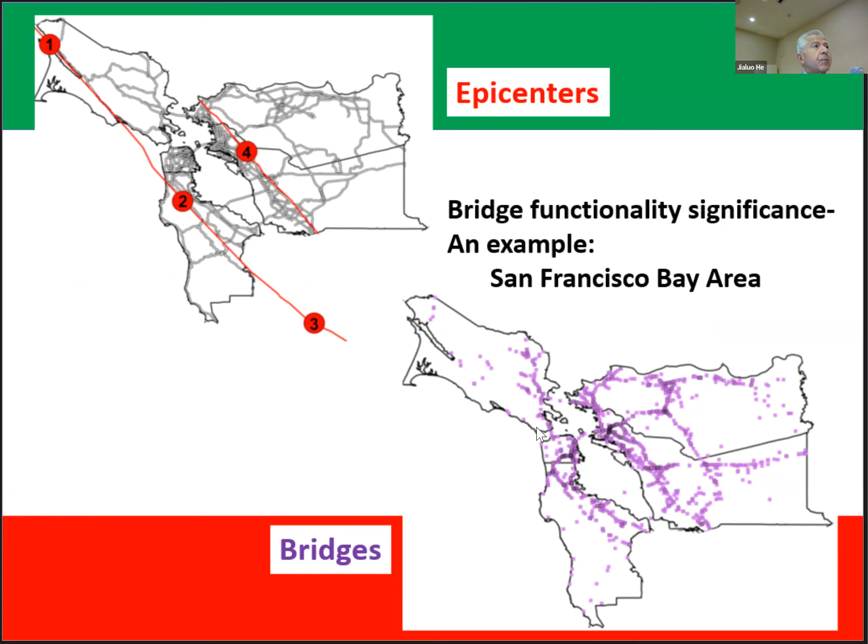So it is something very important - the fact that we are accepting substantial damage and the fact that bridges will not be replaceable. So our definition - we are all engineers or material scientists, right? Our definition of failure and success, according to our seismic design codes, are this.

If you look at the bottom figure on the left, that's a bridge that was subjected to the '94 earthquake. It did not collapse, so it met the design objective, right? But this is how the bridge looks like. You definitely have to shut it down to traffic, and it's not usable anymore.

Now, failure is the one on the right side. This is the one where we have a bridge column - believe it or not, it has completely failed, and this is the superstructure that has fallen. So this is a design failure, but this is considered a design success.

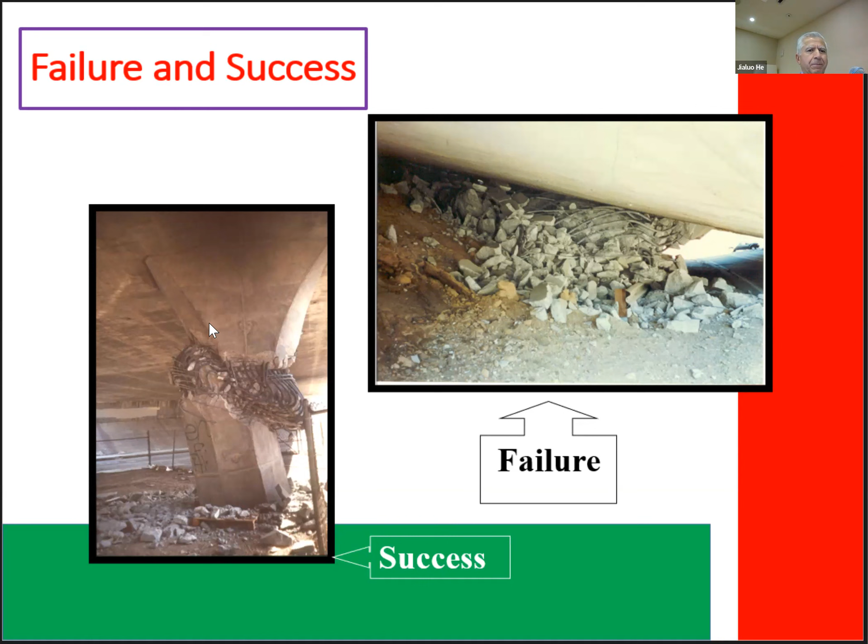And that's something that obviously the public will have a hard time understanding and accepting - that yeah, this is not successful, this is bad engineering. This is what they're going to tell us.

So what if we go back and rethink our basic design philosophy that we have in our codes? Maybe no collapse is not enough, is only partial success. So we should also look at serviceability after earthquakes. What are the issues? What are the seismic damages that you get? What are the things that we have to deal with?

Well, there are two things that happen during a strong earthquake. One is permanent drift that makes a bridge unusable. The other one is damage to plastic hinges, to critical parts of the columns, etc. So how do we address that? How do we try to address these two issues?

Well, there are a number of ways we can work with that. One is performance-based design, and we do use that in signature bridges - again, by far the minority of bridges. We might try to use base isolation to keep the bridges functional, or we may go to advanced materials of different types and different styles and different detail, trying to address this serviceability after the earthquake.

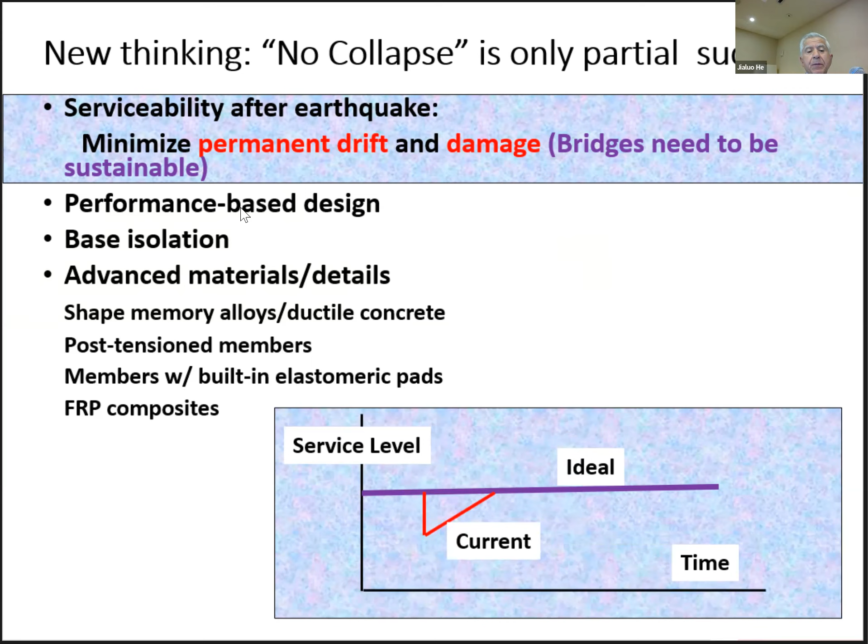So if you look at the resiliency curve that you have seen many times, that red zone is what we're trying to avoid. The red zone is what we're trying to either minimize or avoid so that we can, again, keep the network functional.

Now, let's talk about earthquake damage. And I say new bridges because I just want to make sure we are not covering substandard bridges that need to be retrofitted and all of that. No, I'm talking about the bridges that we design now and build now.

So these are the bridges from the past 20 years. We're pretty much meeting all the code objectives. So we have plastic hinge damage and permanent drift - these are the two main issues that make bridges unusable.

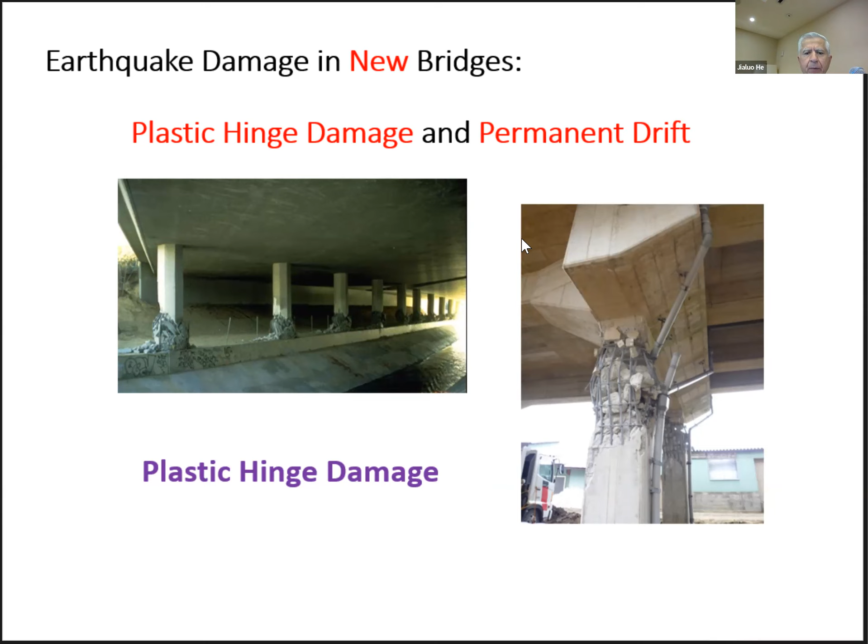So this is how plastic hinge damage looks like. Usually at the ends of the columns, that's where the maximum moment is, and we have the cyclic effect of the earthquake.

So going back and forth, and the other one is the permanent drift. After the Kobe earthquake, a lot of bridges, about 100 bridges, were torn down because of the permanent drift. If you looked at the damage in the columns, they were not that severe, but they were tilted. And because of that, people didn't feel safe to use these bridges, so they shut them down.

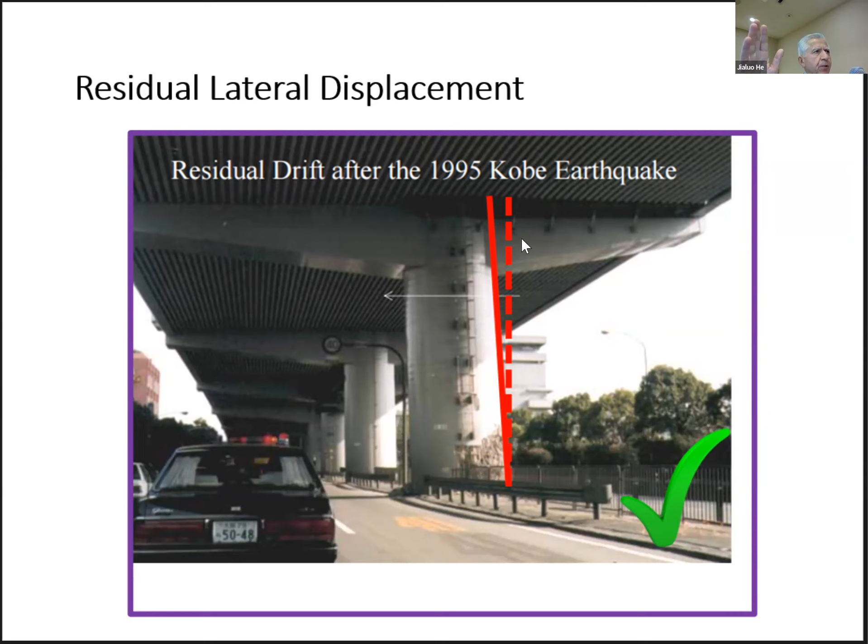So in order to keep bridges serviceable, there are two things we have to address: the plastic hinge damage, control that, and the permanent drift, try to avoid that. Now let's talk about the plastic hinge damage. What's causing plastic hinge damage in conventional reinforced concrete bridge columns? Well, concrete by itself is a brittle material, unless you help it with confinement and all of that.

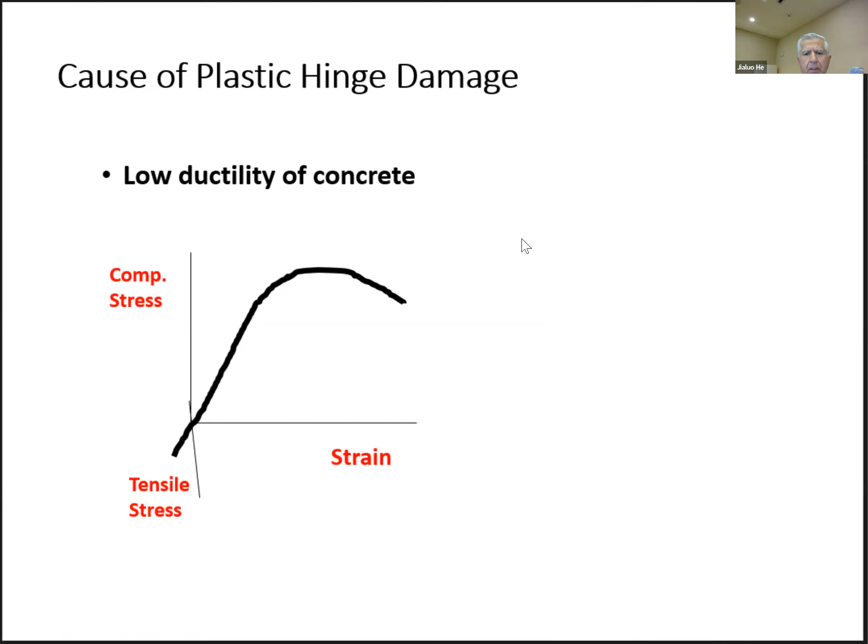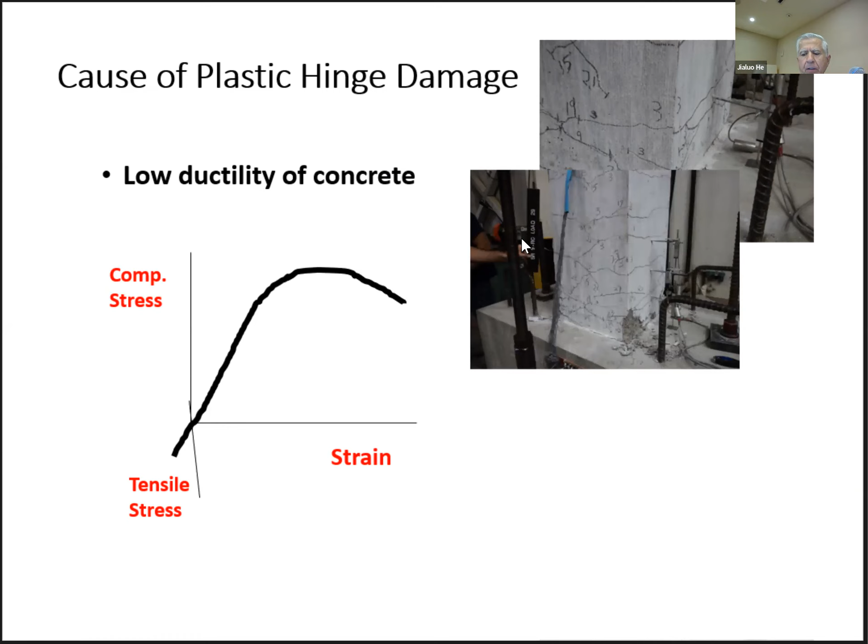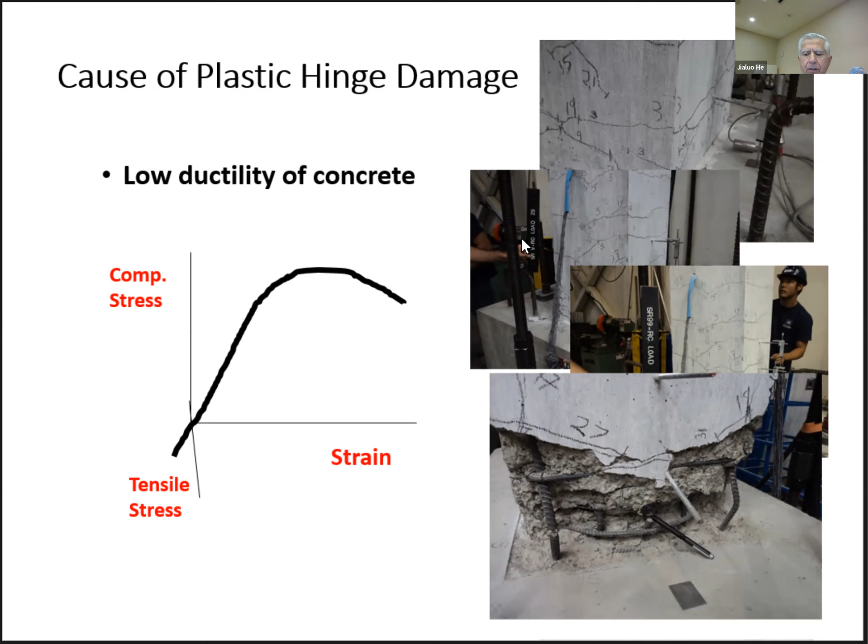So what happens is, let's say if you take a bridge column and begin to cycle the load to simulate the earthquake, in the beginning you have some cracks in the plastic hinge area. As we increase the amplitude, there is more cracking and spalling of concrete. This continues, and at some point you begin to have exposed reinforcement, and eventually fracture of the bars. So that's how we end up with plastic hinge damage. It's a low ductility of concrete, and especially the surface concrete, but even the confined concrete at some point, where the steel ruptures, the concrete itself will fail as well. So that's the cause of plastic hinge damage.

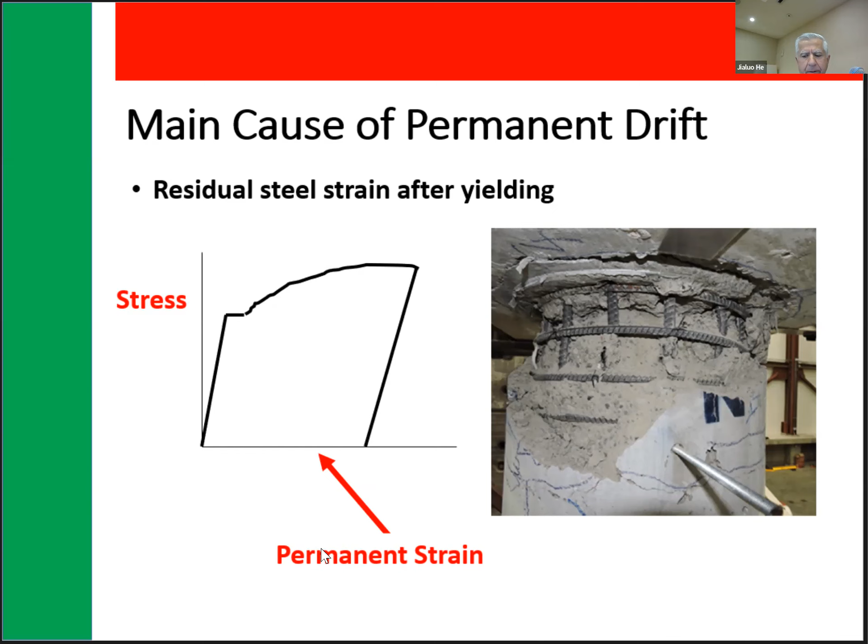How about the main cause of permanent drift? How do we get that? Well, for conventional construction of steel and concrete, the problem is with the steel. Steel is a ductile material, so if you look at the stress-strain diagram for steel, under strong earthquakes we are going to have substantial yielding. However, when the earthquake stops, we end up with this permanent strain, and that permanent strain translates into a permanent drift. That's when the bridge is tilted towards one direction, then it's not usable. It doesn't feel safe, even for ambulances and a variety of emergency response vehicles.

So how do we deal with plastic hinge damage? How can we reduce it? There are different ways to deal with this. The use of what is called ECC, which is basically a grout that has fibers—fancy name, engineered cementitious composite. It's a mouthful, but that's what it is. Or UHPC, ultra high performance concrete, where you have steel fibers. It's also possible to use elastomeric rubber material in the plastic hinge area—that idea came from Professor Kawashima in Japan some time ago. Fiber reinforced polymers are also a material that can be used to help.

So with ECC, this has a nickname of bendable concrete. This is a sample where there is no steel, just the fibers—polyvinyl fibers—and the grout. This is the rubber I was talking about. The UHPC gets very high compression strength, but it's able to maintain some level of compressive capacity under large strains, and also has high tensile strength. Composites also can help minimize plastic hinge damage. So a couple of samples of these you can see here.

So this is where we have a UHPC plastic hinge of a column, and we subjected that to shake table testing. This particular run was twice the design level, and you notice there isn't much damage within the plastic hinge. During this run we fractured it—we keep testing until there's failure. But at the design level, there was no issue at all. Even at about 175% of design level, there was no issue.

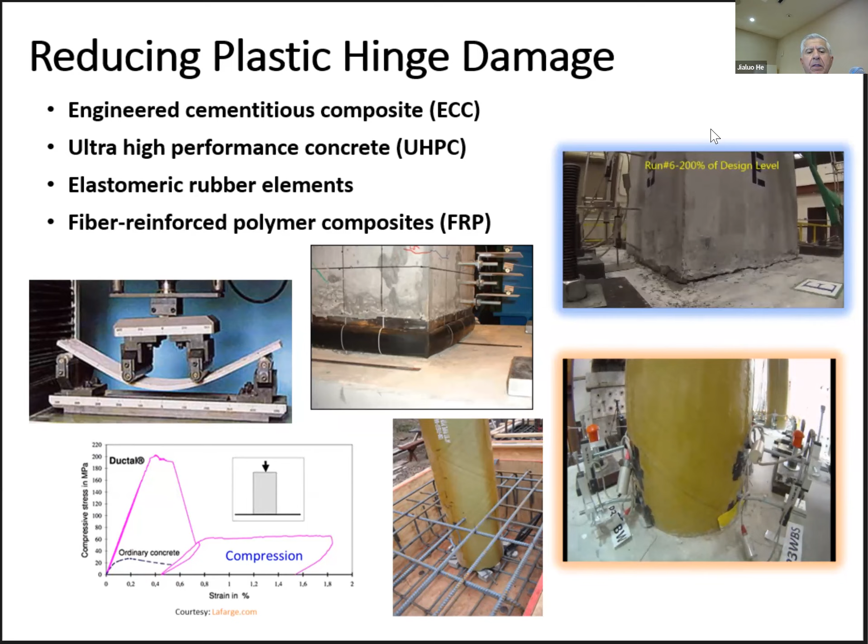Or in this case, we have the composite. This was part of a 4-span bridge model that we tested in the lab. Again, under very large earthquakes, it performed well and did not show any sign of damage. So there are ways to try to deal with controlling plastic hinge damage.

How about reducing permanent drift? How do we do that? There are different ways of doing that: post-tensioning columns with steel tendons, using carbon fiber reinforced plastic tendons, or iron-based shape memory alloy.

Also, fiber reinforced polymer composite can help reduce the permanent drift. Now, if you look at lateral force versus lateral drift, the recentering that we're providing means that when the load goes to zero, so does the displacement. And that means that after the earthquake, the bridge goes back to its original place, or nearly so.

So these are the CFRP tendons we have used in some projects.

Now, what makes super elastic shape memory alloy effective is that if you look at the stress-strain diagram, you get this flag shape response. Unlike steel, which after yielding follows a path that gives permanent strain once we remove the stress, with super elastic shape memory alloys the path is like a flag, meaning it comes back. Once the stress goes to zero, the strain is also zero.

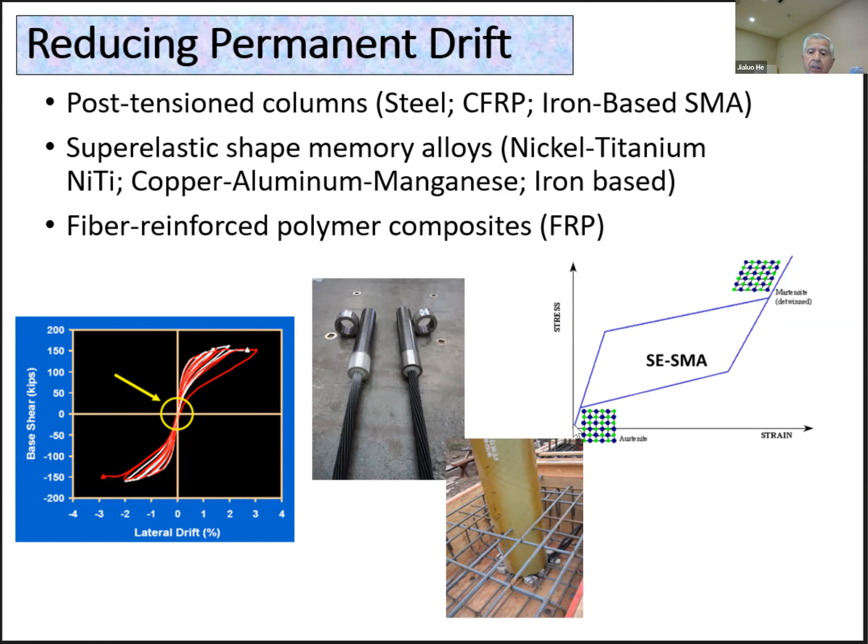So these are the kind of things that could help us reduce that. And through many projects we have already evaluated that: single columns, multi-span bridges inside the lab, and analytical work. We have shown that, yes, it's possible to do that.

These are some samples. This is where we have CFRP, PT column. The fact that you have the cluster of curves coming here tells you that we didn't get that much permanent drift at the end of the earthquake.

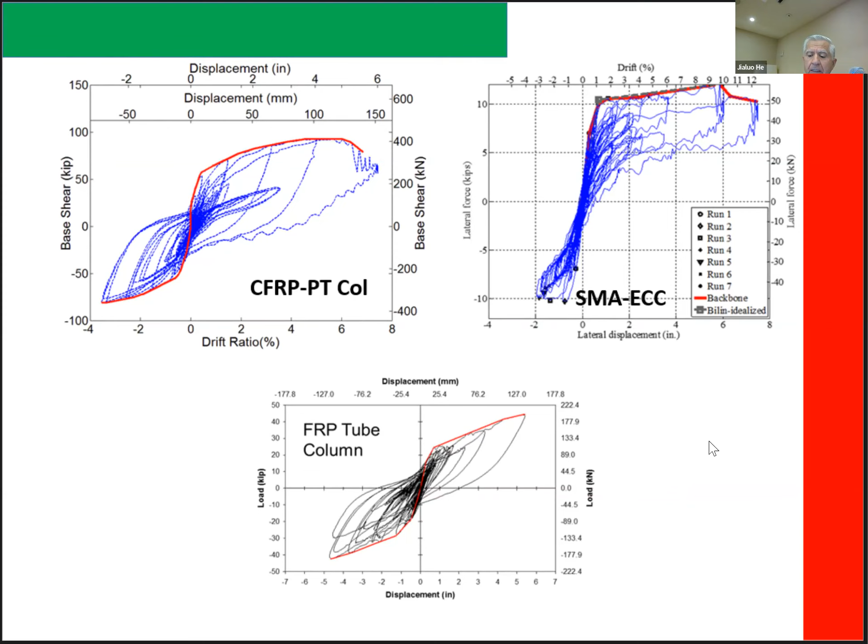In this case we're using copper-based shape memory alloy, much cheaper than nickel titanium, and again it's coming to the origin. The curve comes through the origin, and we essentially have this flag shape response. When we use FRP tube, again we are able to bring things back to the origin, so not much permanent drift. These have been proven through various projects that can be effective.

Now there is another type of shape memory alloy. This is an iron-based shape memory alloy, much cheaper than other types, but still special. It is heat sensitive, temperature dependent. I'm going to show you this bar, which is heat sensitive shape memory alloy, iron-based.

We turned it into an S shape, but this bar remembers that it was almost straight before. So when we apply heat, it tries to go back to its original shape.

So it's just sitting there waiting for some hot water to be poured in the dish. And look what happens when we pour the hot water in that dish. Magic, huh?

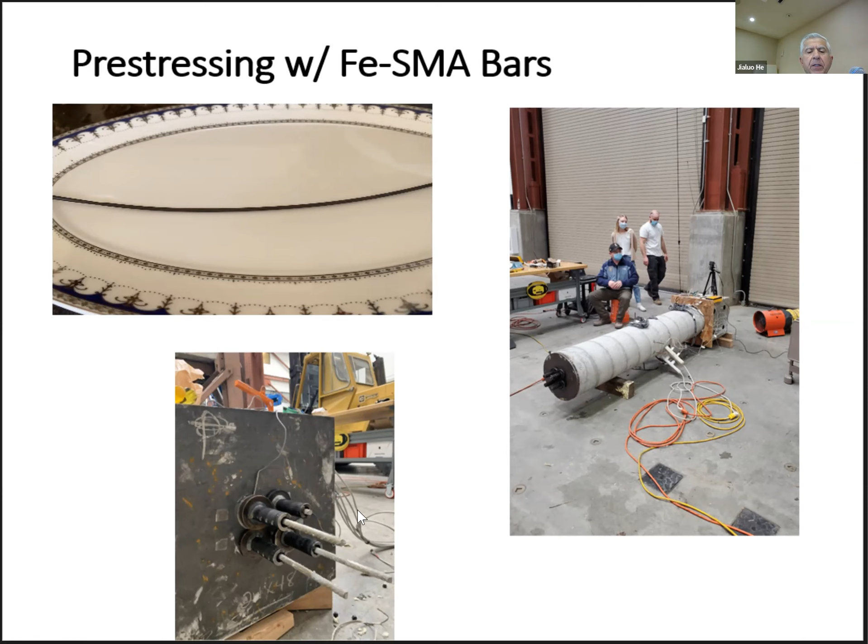It's the kind of thing that we can also tap into, and we did that in one project we tested early last year at UNR. We built a large scale ABC precast column and used these Fe-SMA bars, the central bar, for recentering. And it turned out to be effective.

So this is the elevation of the column that we used. It's a large scale column and ABC, so it's dropped into a socket connection over here. We had the central Fe-SMA bar.

Here I'm showing you the lateral drift ratio versus time for different earthquake runs. We started with small earthquakes and gradually increased the intensity. You notice that even up to about 4% maximum drift, the deviation from the baseline was minimal, meaning permanent displacement was extremely small.

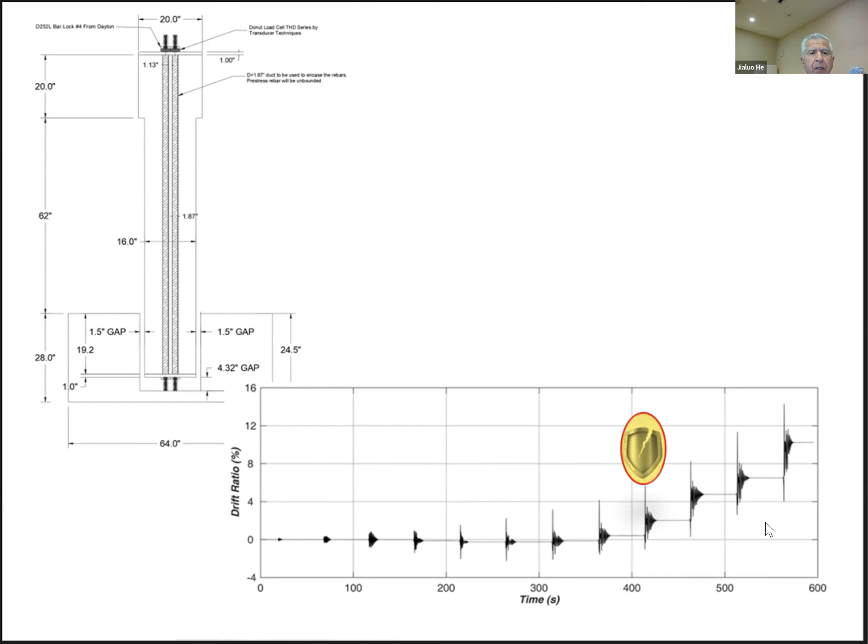This trend continued until we fractured the Fe-SMA bar. So during this run we fractured the Fe-SMA bars, and once that happens, the deviation, which indicates permanent drift, began to increase substantially because we put a very strong, very demanding near fault earthquake that would cause large displacement. So it was very effective, that worked.

Also using shape memory alloy and nickel titanium, these are some samples. Here I'm showing you two columns: one is a conventional column, and this is the one where we use shape memory alloy in combination with ECC. After 10% drift, this is how the conventional column looks like, and this is how the nitinol ECC column looks like. Again, this is very repairable.

There are some cracks at the base, very repairable, and because there is no permanent drift, we can continue using the bridge, especially after the seismic loading, after the strong earthquake. You could have fires, injuries, ambulances, fire trucks, they all need that bridge. So with this detail, we can use that.

Just to quantify that, in this particular project we used 3 columns, though I'm only showing you 2. I'm showing you residual drift ratio versus the maximum drift that we applied. For a conventional column, that residual drift keeps going up, as you see in this conventional reinforced concrete column. But when we use shape memory alloy, especially in combination with ECC, the permanent drift was about 1/6 of what we had in the conventional column. So it was very, very effective.

Again, the case where we're using UHPC and CFRP tendons after the earthquake, this is how a conventional column looks like, but with PT alone, without really doing ECC or UHPC.

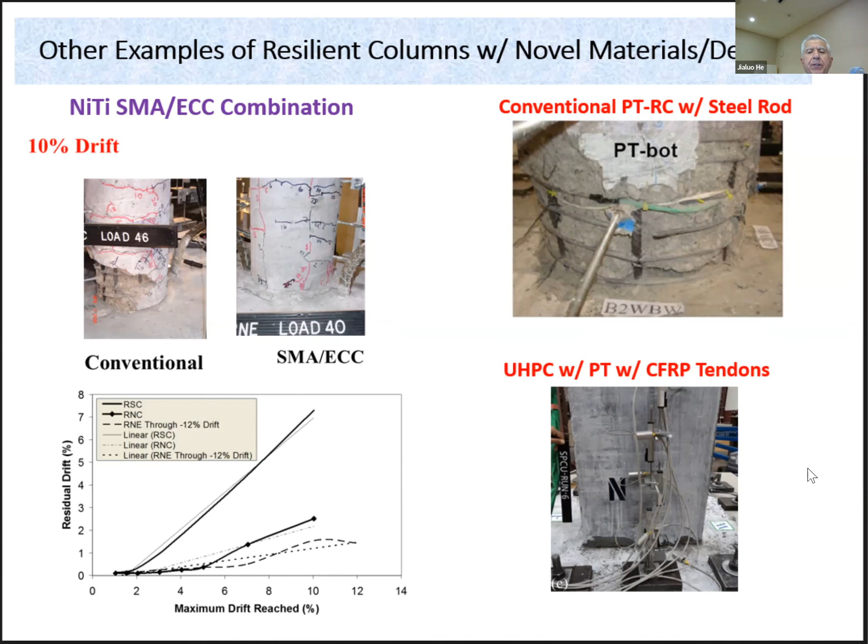But this is where we use CFRP tendons and UHPC. So indeed it was effective. Now, is this a dream or reality? Well, I'm pleased to tell you that it's not, but we're certainly a few steps closer to reality than just a dream. Why? A few years ago, I did a project, my team, funded by NCHRP, where we developed guidelines that anybody who comes up with these new novel details could use to evaluate them. So we developed these guidelines.

We took some of the select details and showed there are 5 or 6 design examples in this document. And this document is available for free, can be downloaded. Those of you who have worked with NCHRP know that NCHRP is actually a technology transfer tool, okay? And decisions are made by engineers to fund the project or not. And the fact that there are enough progressive engineers who wanted to know how we can utilize these advanced materials, I think is very, very promising.

And just to show you that that's even more promising, the fact that we have used and implemented one of these details in a bridge in downtown Seattle. This is an off-ramp structure, a 3-span bridge, Alaska Way viaduct replacement in Seattle, but they totally changed the whole setting there. So 3-span bridge, 180 feet in the middle, 110 on the sides, single square columns.

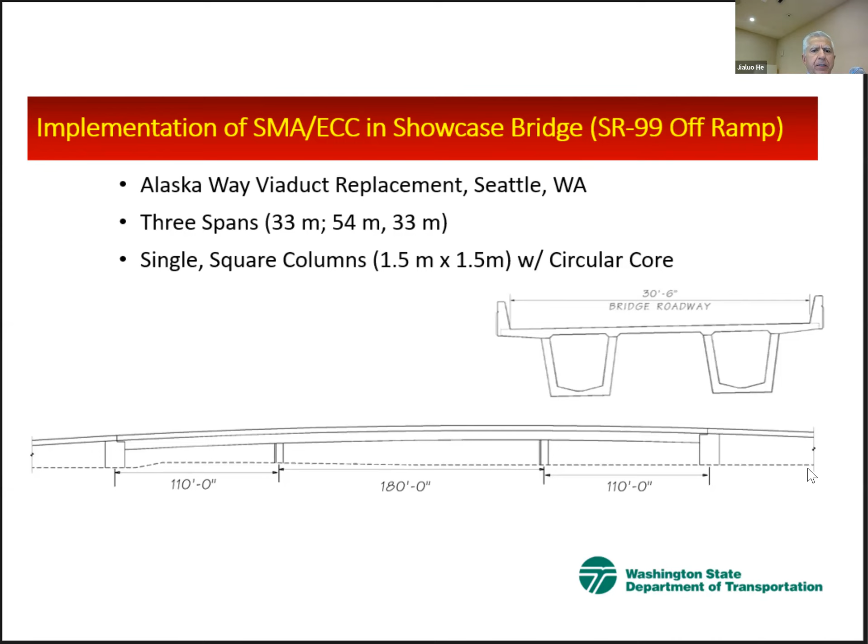Now, to optimize this using shape memory alloy, nickel titanium, and ECC, we did some research specific to this bridge. So we built models of the columns of this bridge. We had one conventional one and two other ones with different lengths of shape memory alloy. So this is the long one, and by long, I'm talking about the length being equal to the side dimension of the column. So it's not that it goes over the entire length of a column.

And we said, well, what if we reduce that to 75% of the dimension of the column, the length of the SMA bar? And even that gave us 10% drift capacity, which was excellent. Even at 10%, you see very little damage. So it was demonstrated for the columns mimicking the columns of this bridge, and we were able to accomplish good response. The end result was that in the actual bridge, we used 80% of the side dimension.

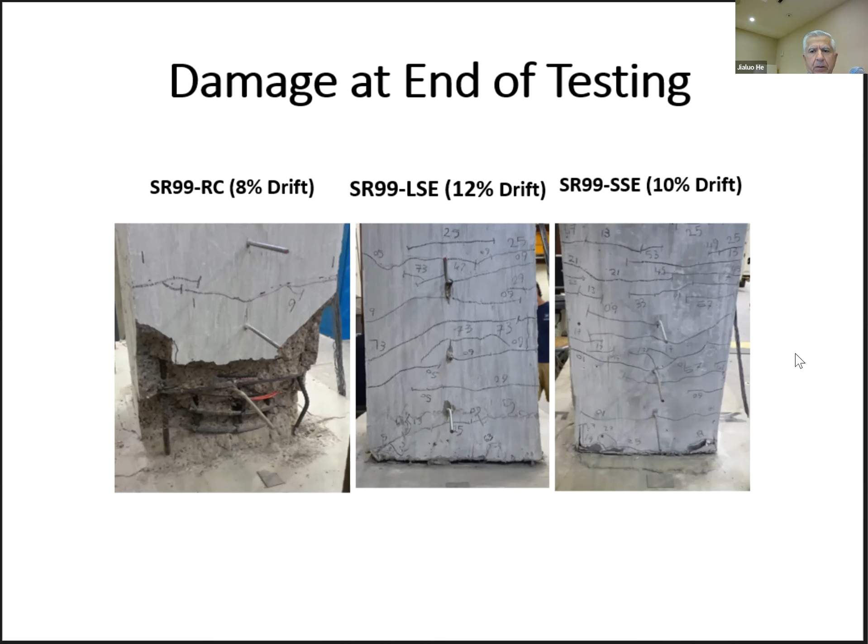So as a result of this research, we found that it is effective. And these are force-displacement relationships, lateral force versus displacement relationships. For the conventional column, it was a well-designed column, right? Met current codes for conventional columns. So we had good energy dissipation and good response. But...

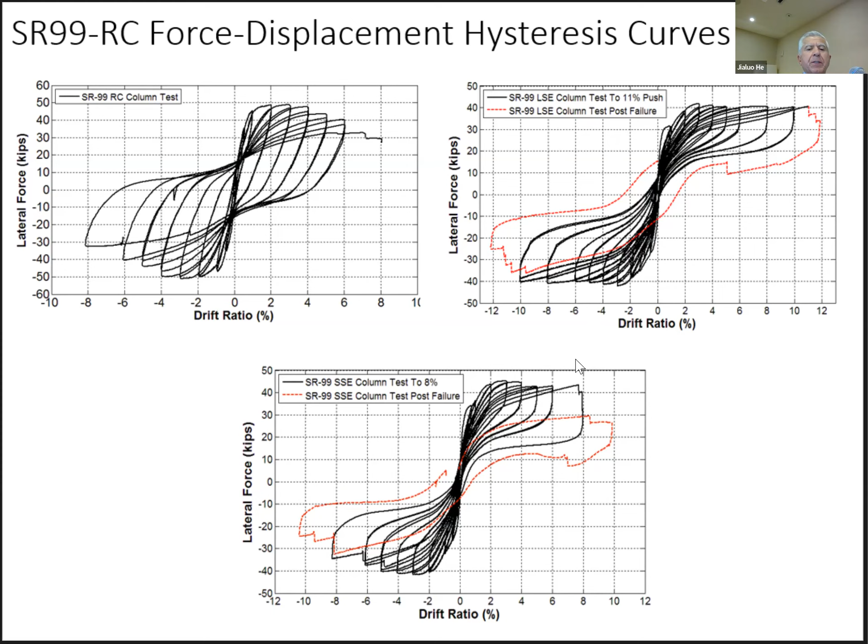For the other two, where we had shape memory alloy, we had good response, but flag-shaped response. That means there is no permanent, or very little permanent, drift. And to quantify that for you, look at the residual drift ratio here versus the drift. These are the two that had shape memory alloy and ECC. This is the conventional column. So we had large residual drift - even under 4% drift, we had about 2% residual drift.

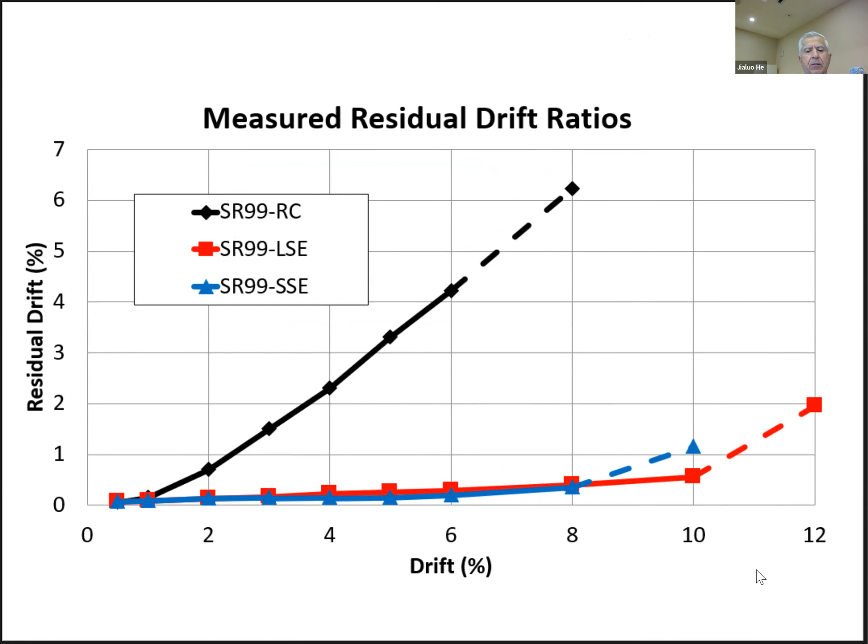So certainly, the effectiveness of shape memory alloy, that combination, was shown. And of course, then we applied that in the bridge. So this is a cross-section of the bridge, and this is the extended column. So we used the material only in the top plastic hinge of the column.

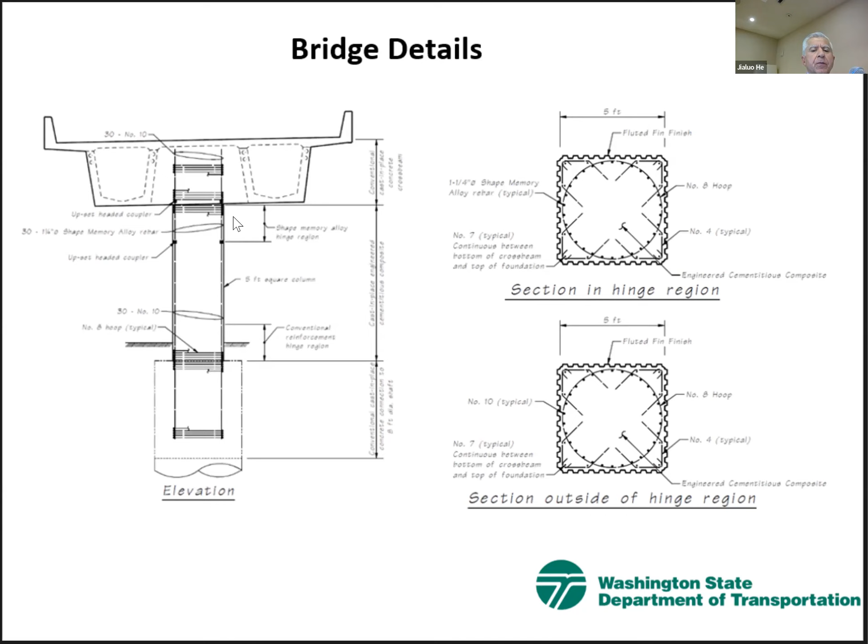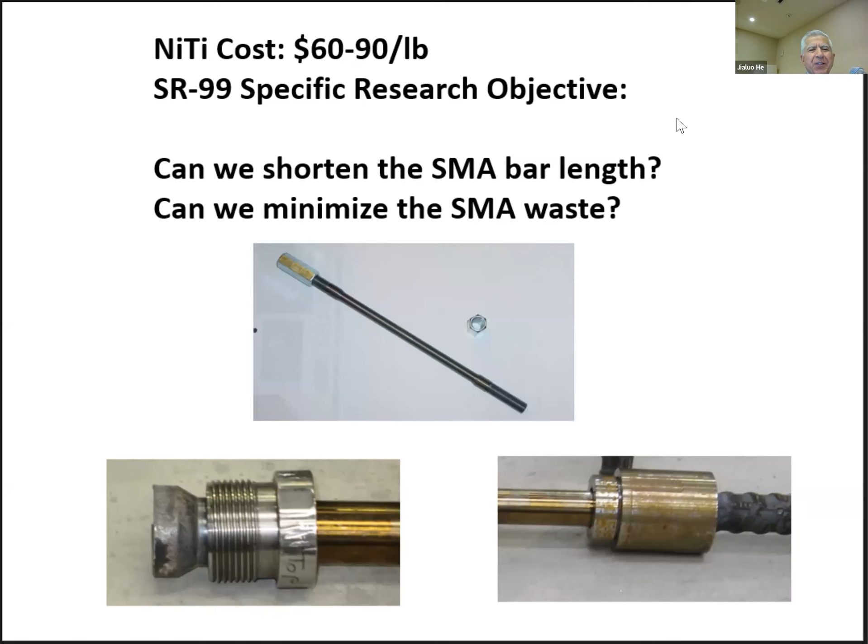And some details of that: these are large diameter bars, 30 millimeter bars, almost like number 10, with 30 bars. And to minimize the waste, we used these standard couplers, HRC couplers, and connected the bars to steel bars. Now, for the quantity that we used in the bridge, the price was about $90 a pound. But for smaller quantities, I guess they charge you more. Chris tells me that now they have raised the price because of inflation and all of that. But this was done successfully in the field.

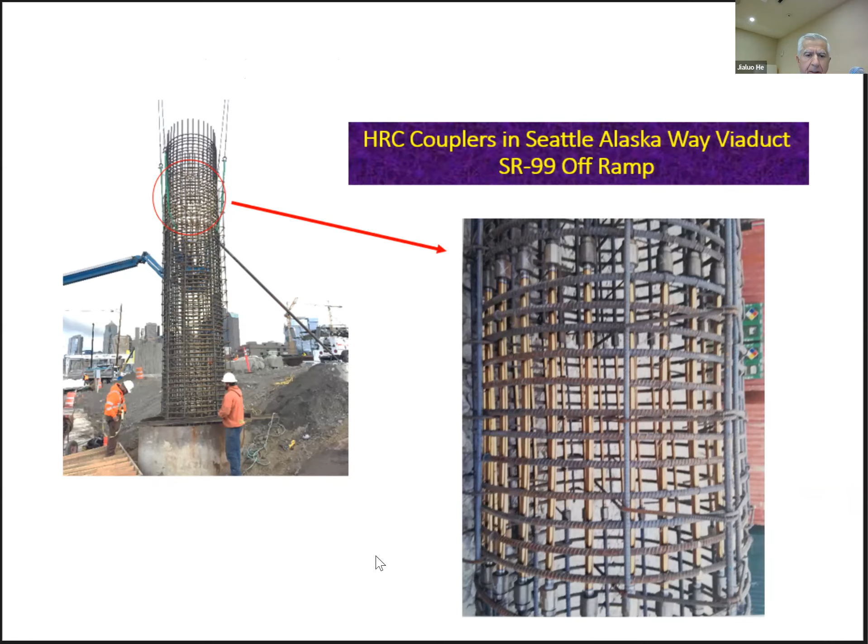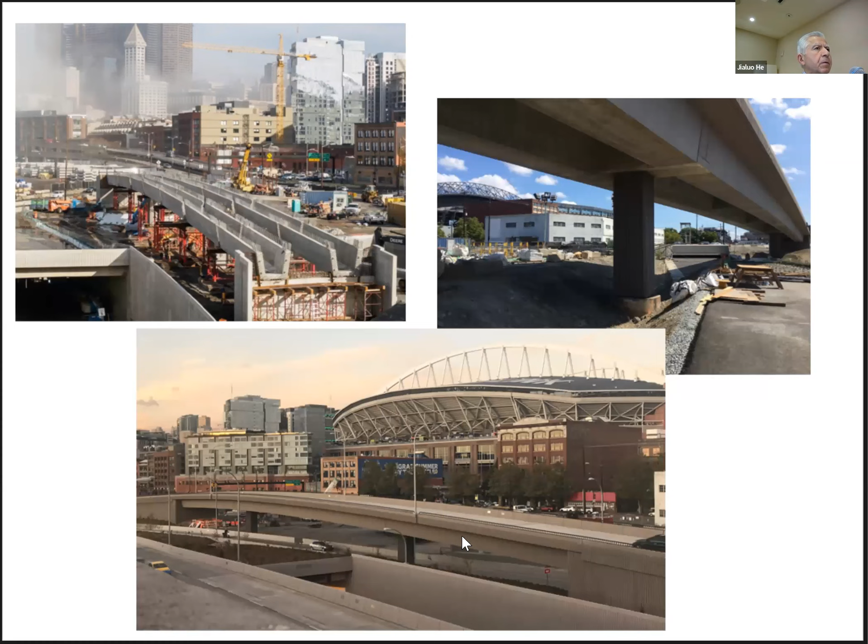This is the column cage. On the top plastic hinge, we have these couplers, and the yellow bars are the nickel titanium bars. So they were connected to steel bars at the top and steel bars at the bottom through these standard HRC couplers. So this is a bridge under construction, and then the completed bridge is shown over here, and the bridge is done. It was about 2.5 years ago that it came into service.

Now let's move to the future. This is futuristic enough, so what does the future hold for us? Let's talk about human psychology and how we live. We are very good at predicting what to expect in the future—we have some visions, some thoughts. We're very good at that. But we are terrible when it comes to predicting how we are going to get there. So the what part is okay, the how part we don't do a good job.

A good example: people used to say someday human beings will be able to fly. Yes, absolutely—that was the what part. But the how part was different. We thought we could put a wing on us and fly. In practice, the how was here: we got there by building jet planes that we essentially fly today. So predicting the future is okay, but the tools we will use to get there are not always easy to predict.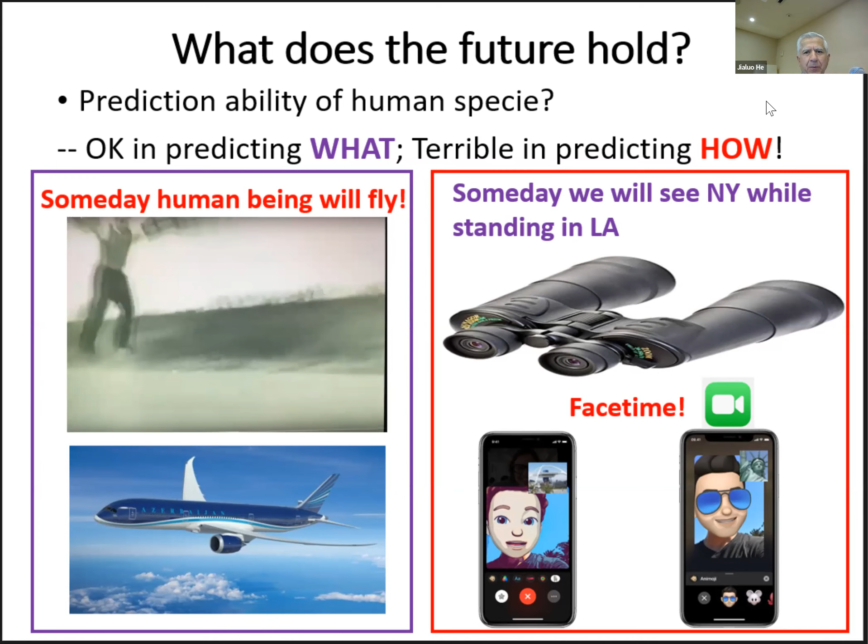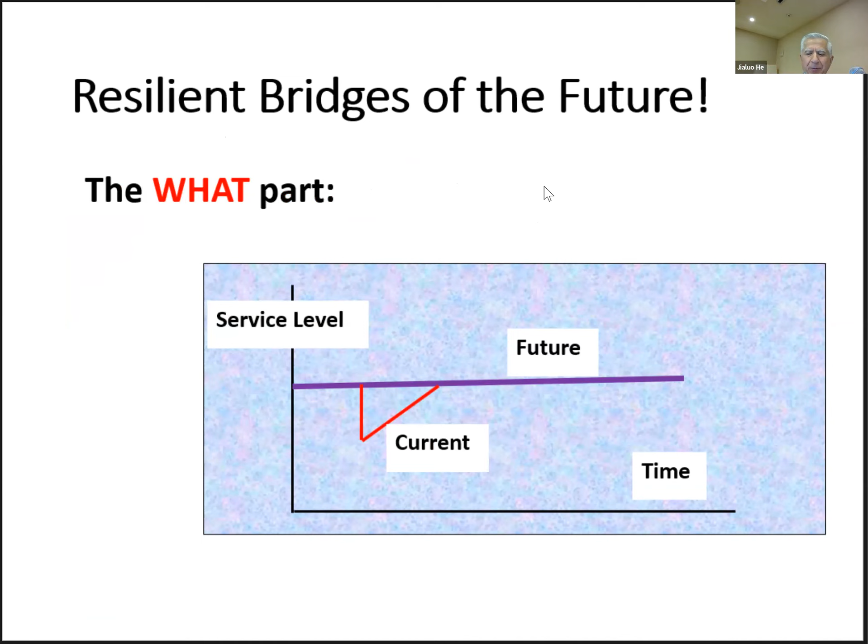So my point is that it's good to have some idea what it is we want to do, but don't be completely sold on the how, because technologies emerge that can help us. Our goal is knowing the what—we want this curve to be straight like this, or nearly so, rather than what we're doing now. But how we get there, well, there are tools we're developing here and there, but you may be surprised others will show up. The how part is where we have to look at the technology and not be afraid to try different things.

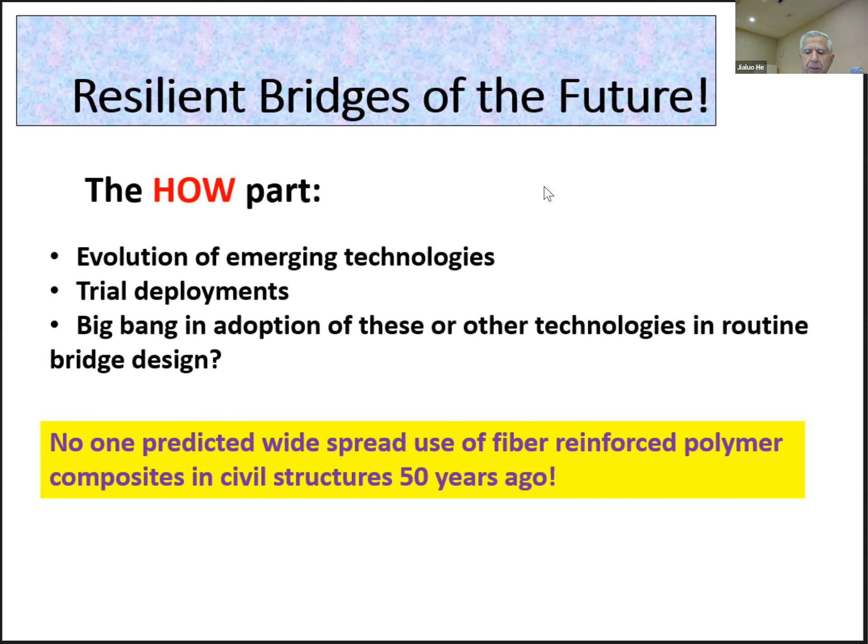Could there be a big bang adoption of all of these? Well, maybe, I don't know, can't tell. But from history we know that fiber reinforced polymers were once purely used for military applications—very expensive, not practical for civil engineering. But now they are quite competitive and can be used. So there's hope that technologies that seem far off someday may become acceptable. In fact, the new project I received from the Federal Highway Administration is looking at copper-based and iron-based shape memory alloys, because they're more cost-effective. We want to see if we can get them to a point where they can be used in a bridge somewhere in the West, in high seismic areas. So there's hope.

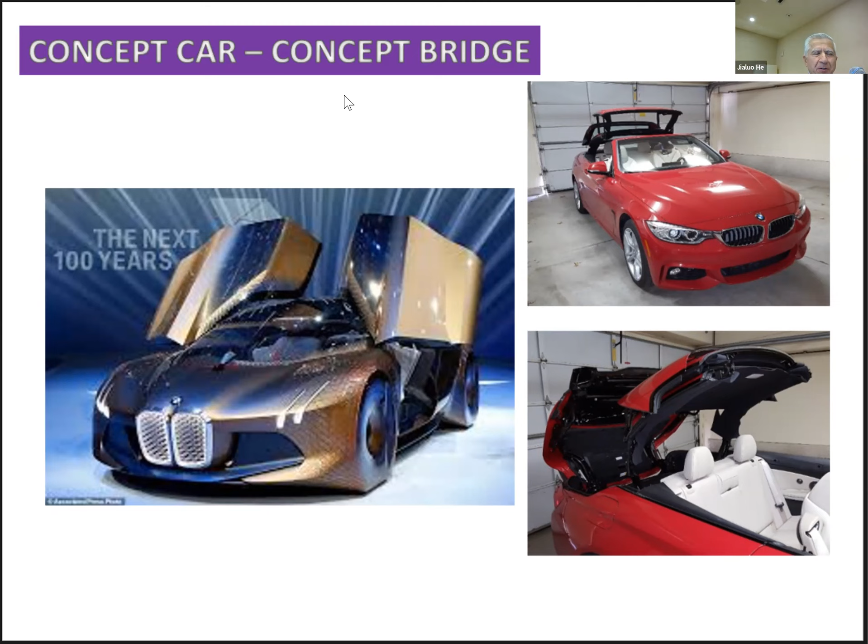Well, if you're doing that with cars, why not the concept bridge? I was having breakfast with a colleague talking about the environment and how our role can be. The issue is that we're wasting a lot of material. What if we design our bridges so they can be deconstructed and reused somewhere else? You know about ASCE report cards and deficient bridges in the US—about 11% of US bridges considered deficient are not deficient because of their structural condition, but because of their function. So these bridges are structurally in good shape. If they were built so they could be disassembled and used somewhere else where they could serve the function, we could be saving a lot of material potentially.

So that's the idea: resilient design for deconstruction. This terminology, design for deconstruction, DFD, I'm borrowing from architects. The whole idea is, can we build something that's resilient and also can be deconstructed? So this is the idea.

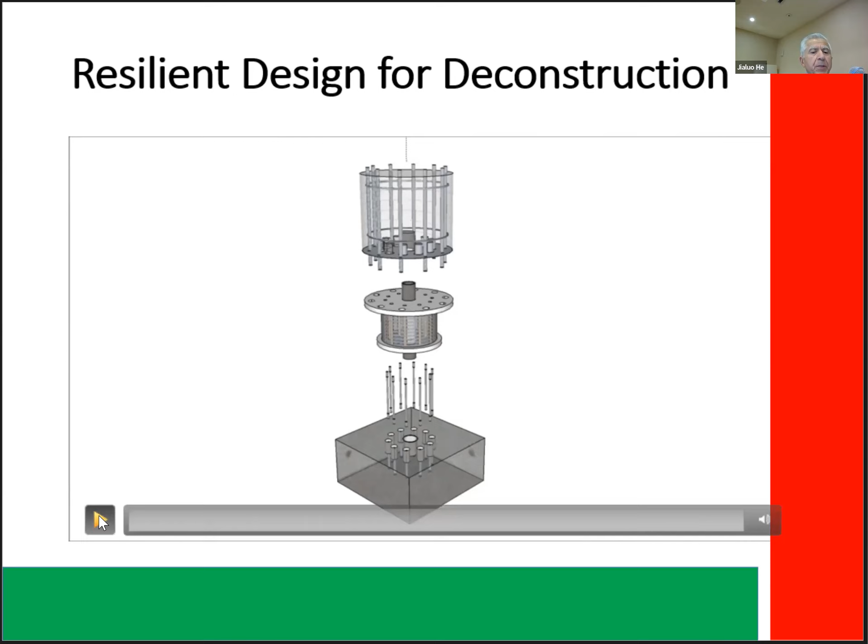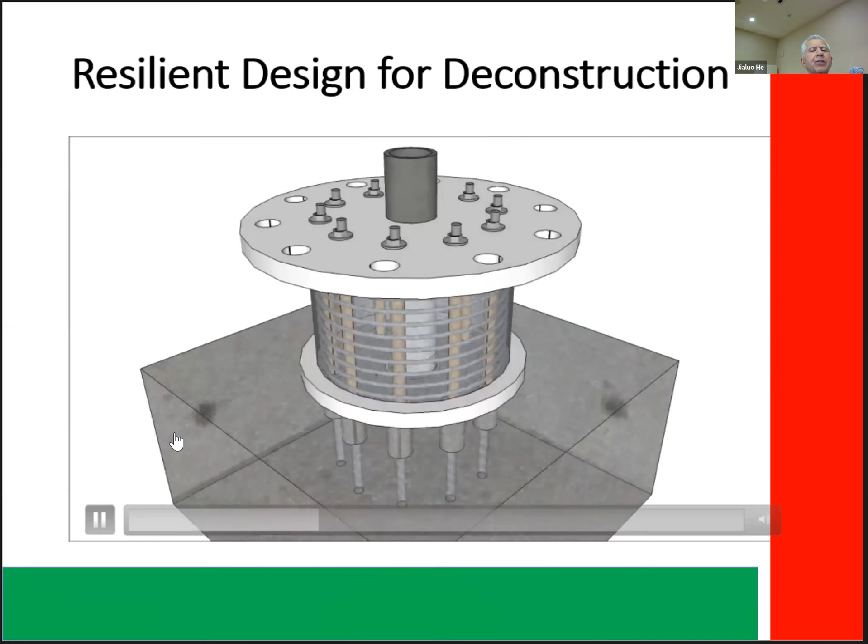So this is the plastic hinge element that is resilient. It could use a variety of innovative materials, so it can work well.

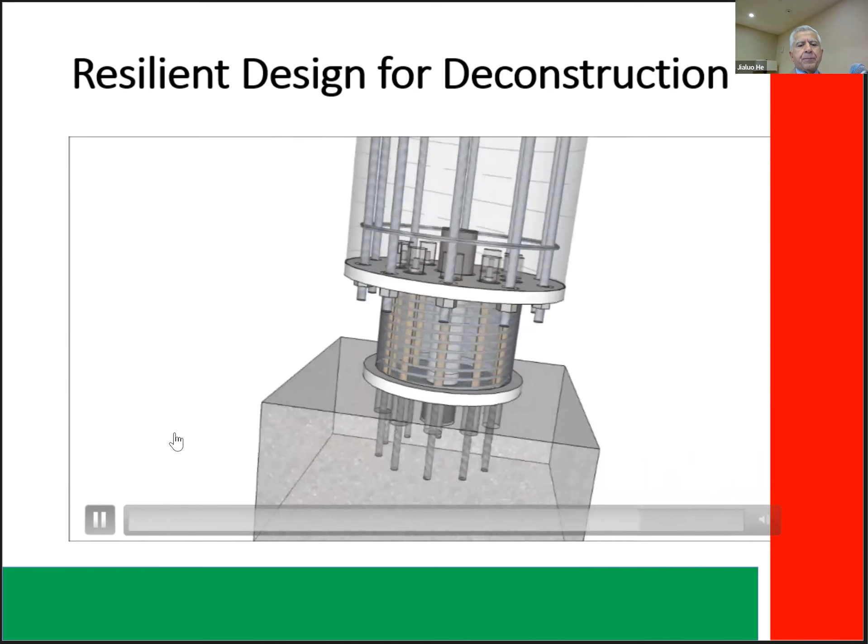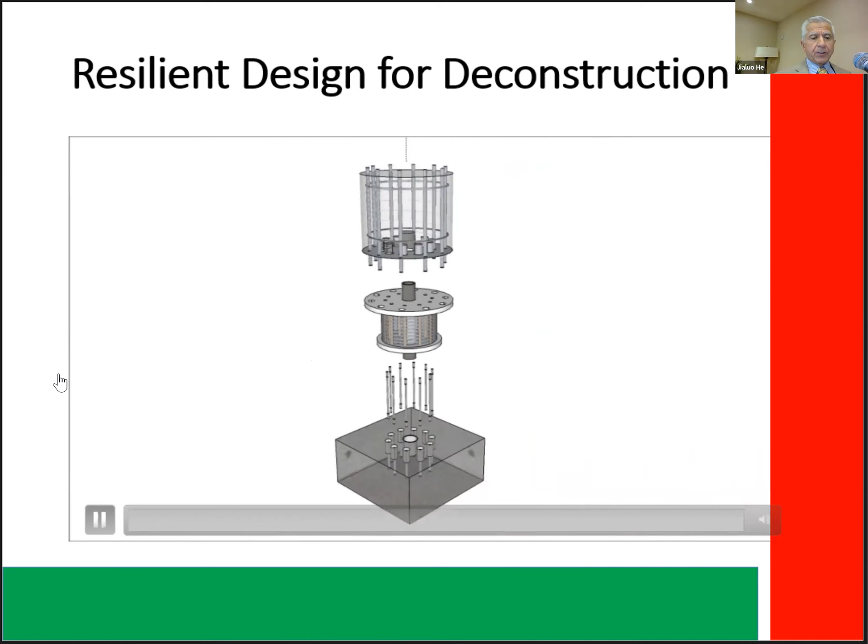And the upper part of the column is designed so that it remains elastic, so all the plasticity will take place in the pre-assigned plastic hinge. So these are some samples where the plastic hinge here, we have ECC and shape memory alloy. That's the plastic hinge element.

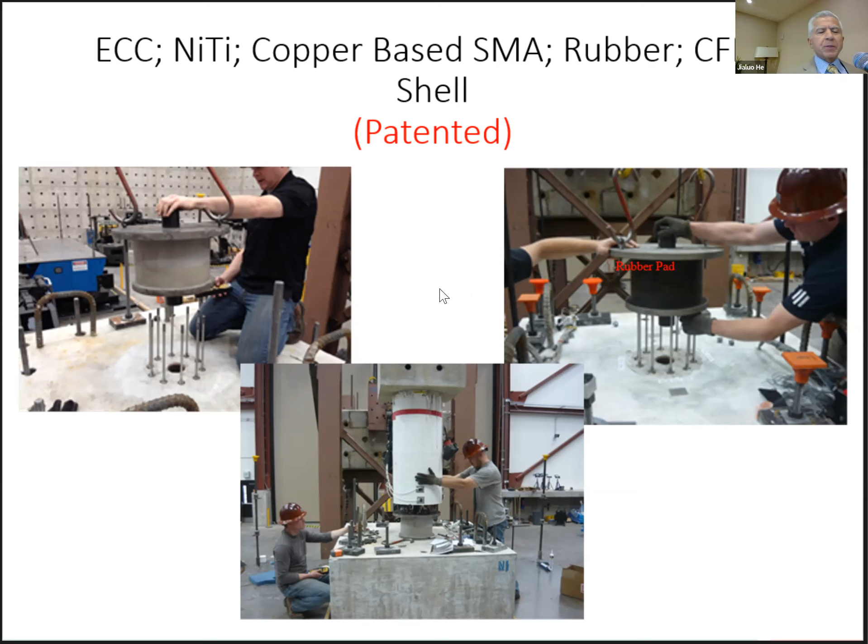This one has rubber, and again, the shape memory alloys. The upper part, we have used composite filled with concrete to remain elastic. This was something that the university convinced me that I should patent it, so we did.

But then we built several columns. After testing several columns and having confidence that this works, we implemented that in a bridge model, in a two-span bridge model, about 62 feet wide, 62 feet long. And this is how the pieces came together.

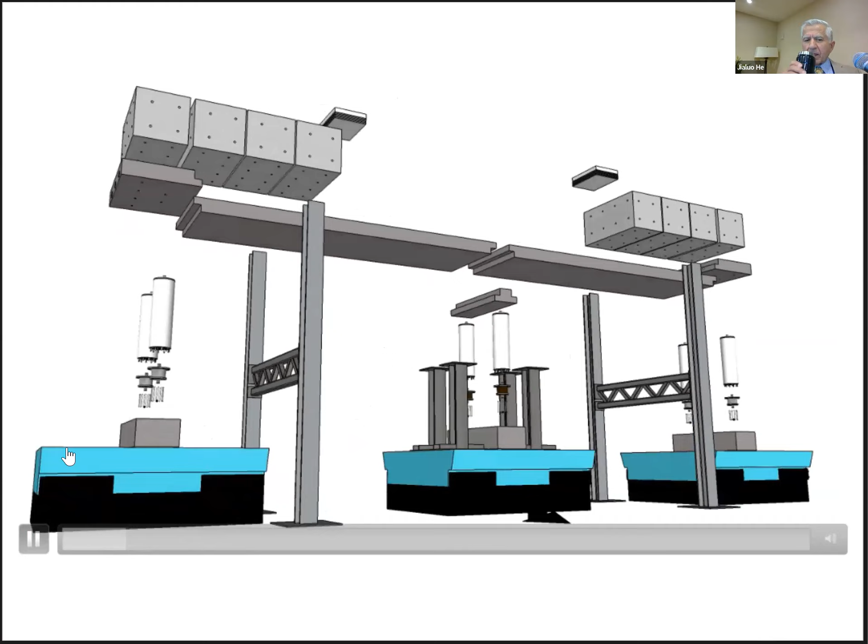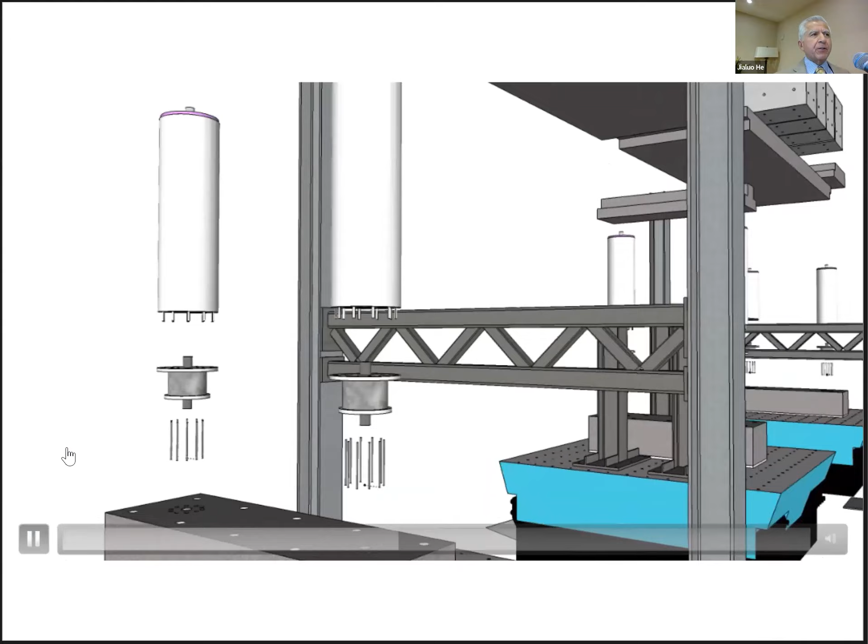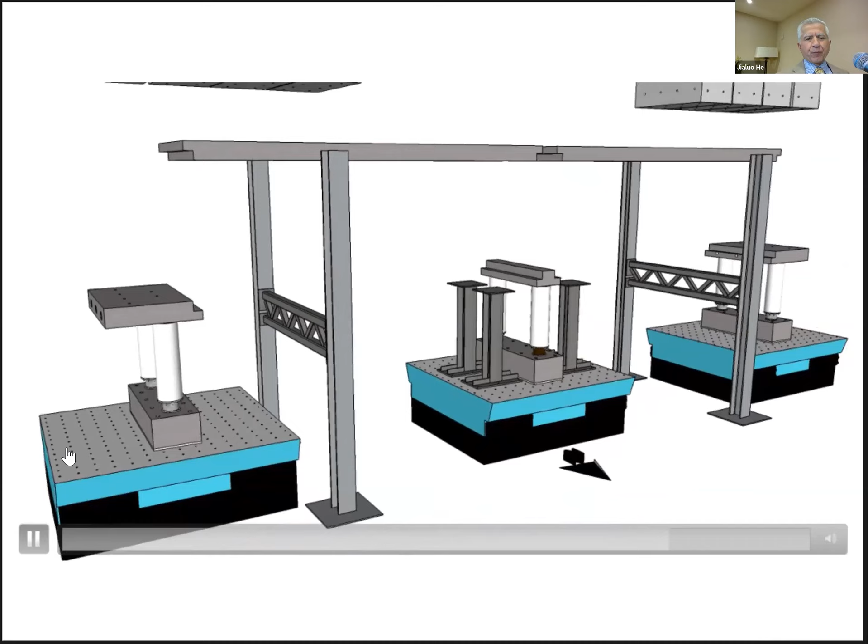A graduate student prepared this and obviously was fascinated by this design, so took his time making the video. So these are all the individual pieces, and then they come together. Then you have the cap beams and the superstructure, and there are these extra weights that you put on the model for our shake table simulation that you need to use. And of course, all of these can be disassembled afterward.

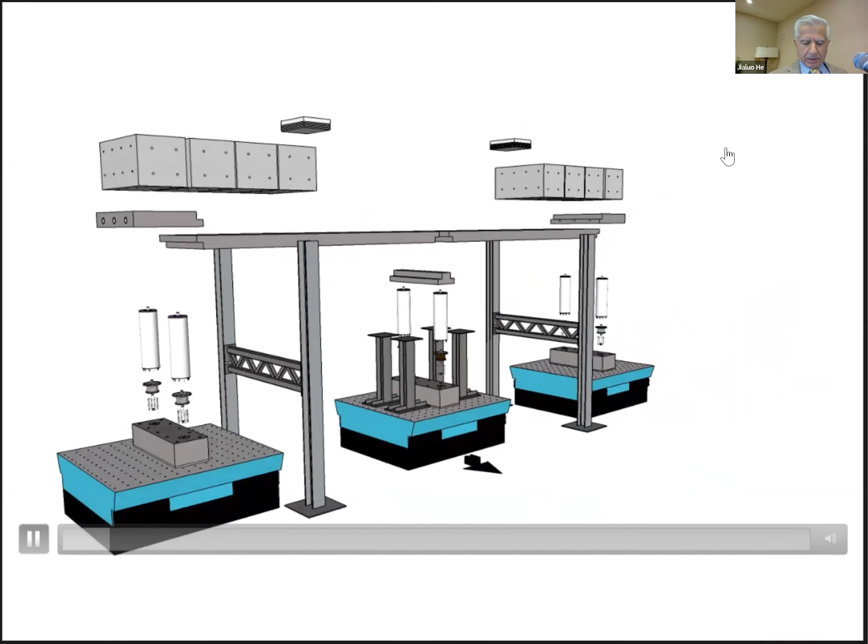Let's see if I can go to the next one. So we built this model, and this was the National Science Foundation project, and we tested this up to 6%.

Again, remember, this was supposed to be deconstructible. That means you build it, put it together, put an earthquake on it, relatively strong earthquake, but go back and disassemble it and reuse it. So that was the idea. So this was the first run. We went to 6% drift.

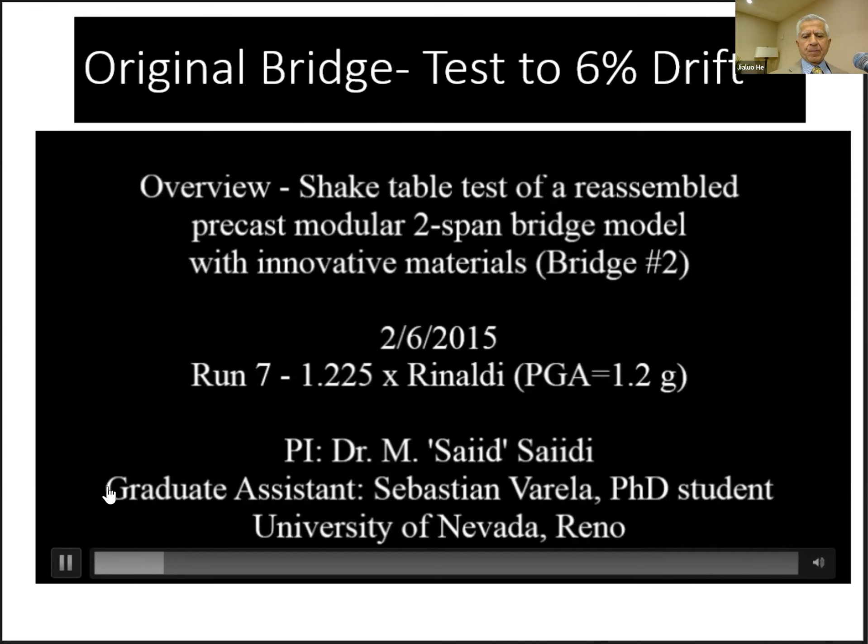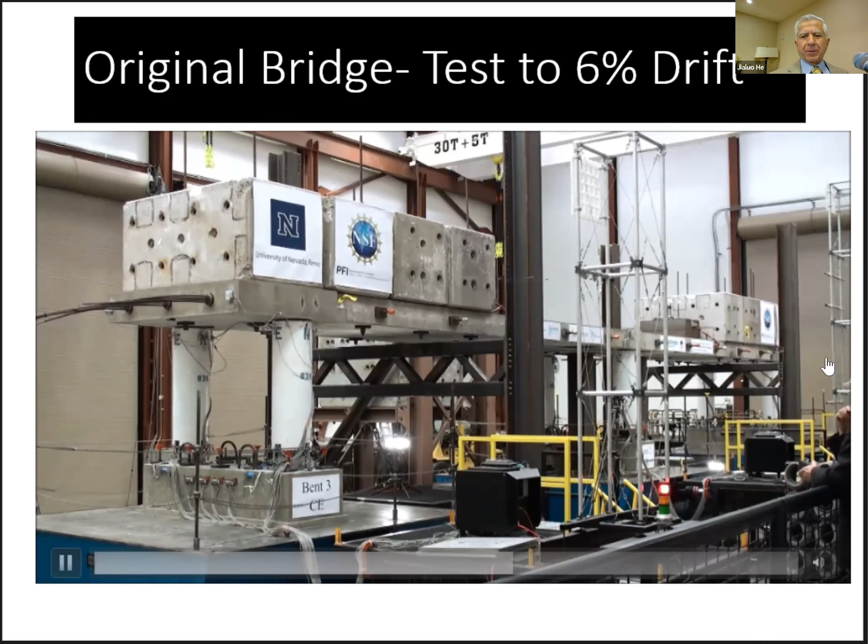Certainly, the bridge did not collapse. These steel trusses that you see here, those are our catch system in case something goes wrong and the bridge does collapse. We don't want our shake tables to be damaged. So looking from the top, again, large displacement. This is a strong earthquake that we applied.

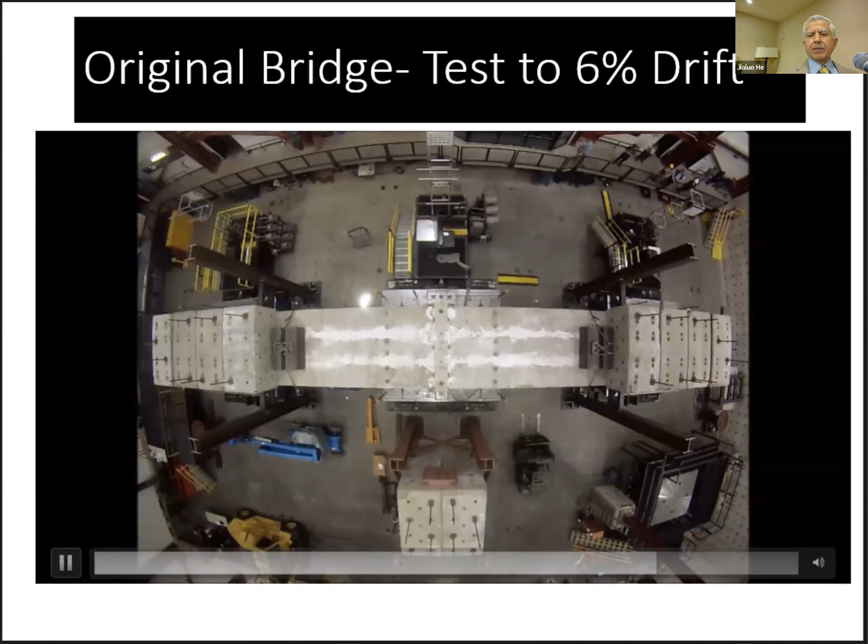So we did that, and then we disassembled it. After undergoing all that deformation, we disassembled. This is the one that has ECC and shape memory alloy in the plastic hinge. There's some surface cracks for sure that are repairable. The element that had rubber, the column that had rubber, there's no damage at all. The top connections, we use what's called a pipe pin connection, no damage at all. And these are the shape memory alloy bars that we recovered.

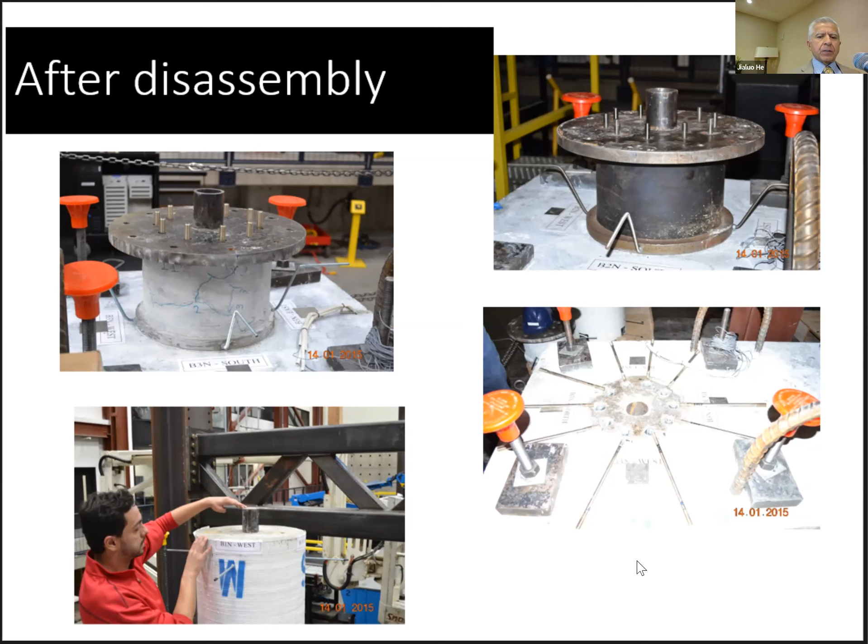So we disassembled this and put it back together and retested that. This time we went to very large drift and until failure. So it worked. This process, this concept worked.

So what is it that we learned? We have learned it is possible to have resilient bridges, but we need to get away from our comfort zone of conventional steel and conventional concrete. There are barriers, no question about it. The initial cost may be higher, and you have to be able to convince those progressive engineers that I mentioned that they exist. The evidence is there.

Don't just think about the initial cost, maybe 4 or 5% extra cost with nickel titanium. With copper, we are hoping to reduce that down to 2% possibly. But look at life cycle cost. The fact that you don't have to repair the bridge, you don't have to replace the bridge, you should factor that in. And we need to develop design guidelines.

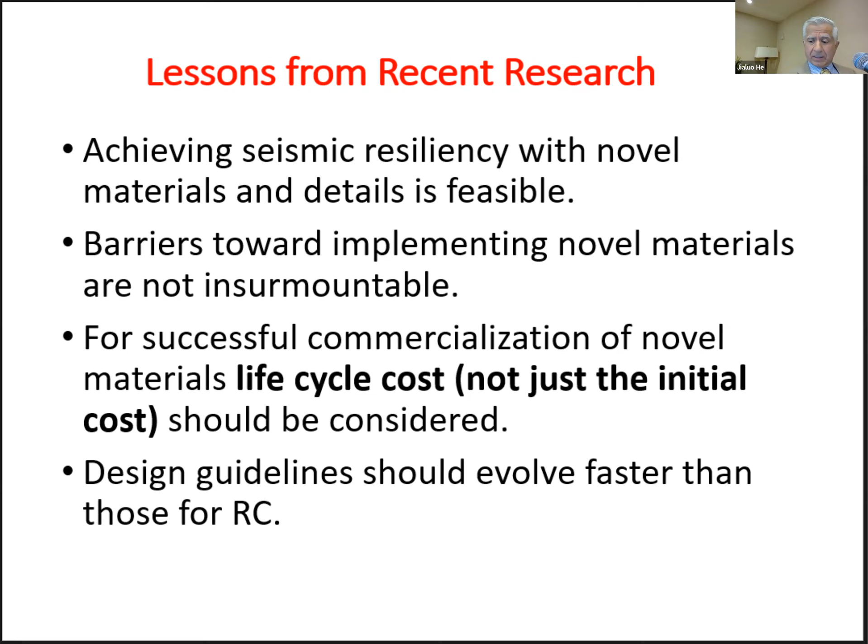We have preliminary design guidelines, but the database behind those design guidelines is a lot less populated than what we have for conventional concrete. Okay, so we have to realize that we need to do that. Now, I think someone was talking to me that, yeah, they're materials engineers. Yeah, we got to talk to them. Structural engineers, civil engineers, need to talk to materials engineers.

And I'm not just talking about construction materials, okay? Get out of our comfort zone. Talk to other people. You may not understand each other's language, jargons. I know that. I've dealt with that, dealing with composite people, shape memory alloy people. But it was exciting to be able to get over those barriers.

So we do need more studies, but I'm saying that it's okay to begin to adopt these technologies and learn from the field application, as well as, of course, we have to do a lot better job in constitutive models and the analytical studies to understand these better and gradually end up with great resilient bridges.

This is my last slide. I'll be happy to answer any questions.

Professor Saiidi, yes. Very interesting presentation, very intriguing.

Thank you. So when it comes to the comparison between UHPC and ECC, especially dealing with seismic settings, what's your opinion? When should we switch? I would...